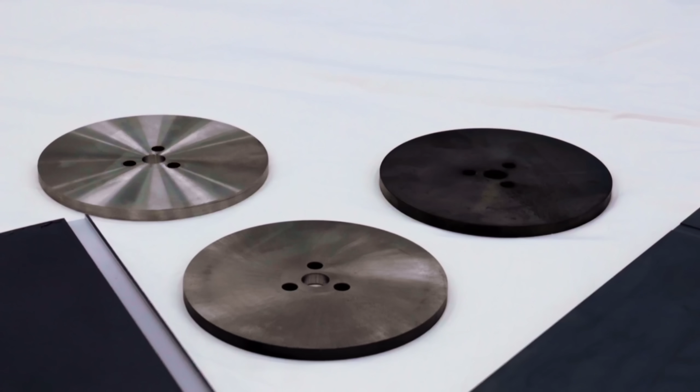Metals have long been the dominant manufacturing material, but ceramics are growing fast. If you're a machinist, you might be thinking ceramics are tough to grind. But are they? In this episode of the Grinding Chronicles, we're going to find out.

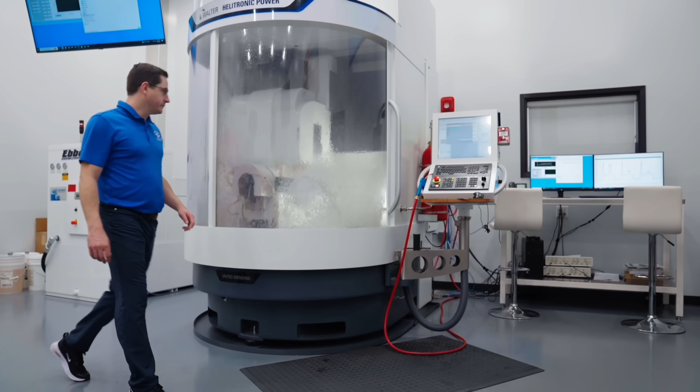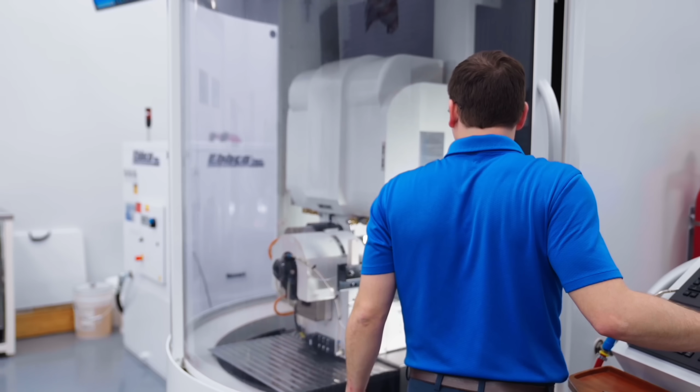For this video, we're debunking the idea that grinding ceramics is especially difficult. While some ceramics can be tough to grind, that's not always true. To explore this, we ran a trial to measure just how challenging different ceramic materials can be. We looked at the power and the force it takes to grind them effectively, then compared these results to various metals. With this experiment, we hope to provide useful insights for grinding ceramic materials.

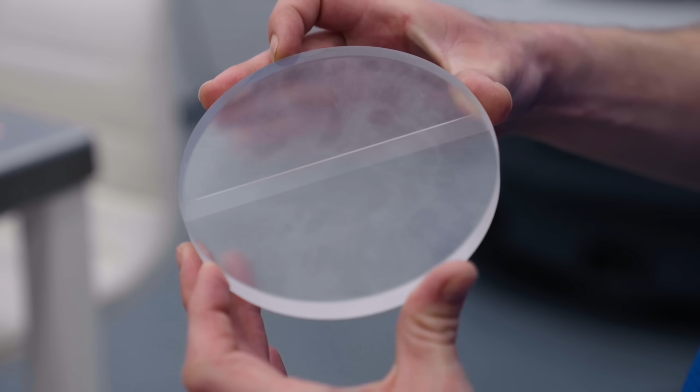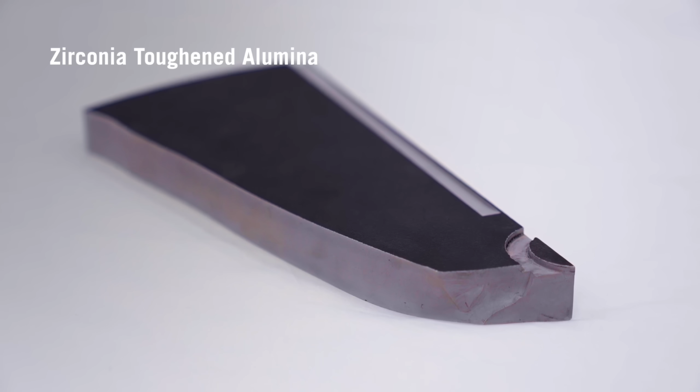But first, why do ceramics get such a bad rap? Well, technical ceramics fall into three main categories: oxides, like alumina and quartz; non-oxides, like silicon carbide and boron carbide; and composites. Composites combine metals, oxides, and non-oxides with particulate or fiber reinforcement. For example, zirconia-toughened alumina is a composite. Held together by strong ionic or covalent bonds, ceramics are typically strong and hard, but often brittle. I know, that doesn't sound good for grinding, but let's look at the trial.

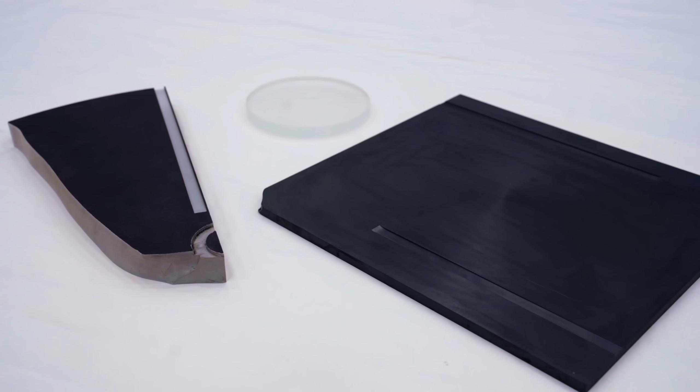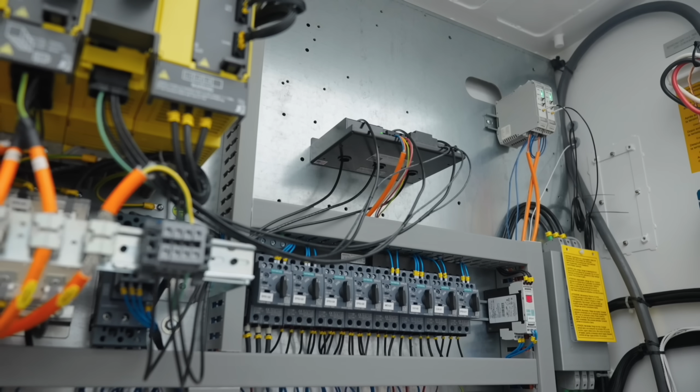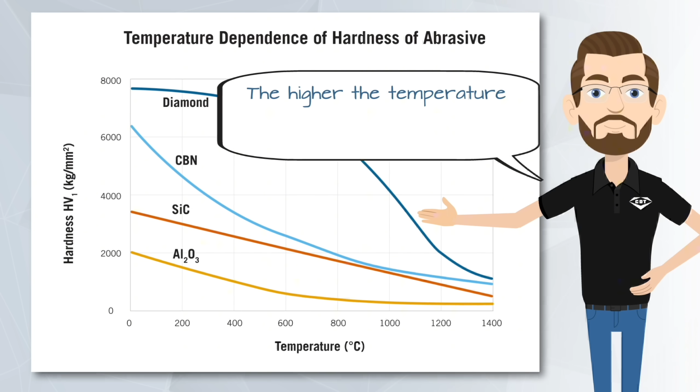Of the thousands of ceramic types, we chose 4 random materials: boron carbide, quartz, silicon carbide, and zirconia-toughened alumina. Each was cut using the same 240 grit vitrified diamond wheel in a surface grind. Sensors measured the power draw and cutting forces. Why are these important? Well, power is used to calculate energy, which determines the grind zone temperature. The higher the temperature, the faster the diamond degrades, wearing down your wheel.

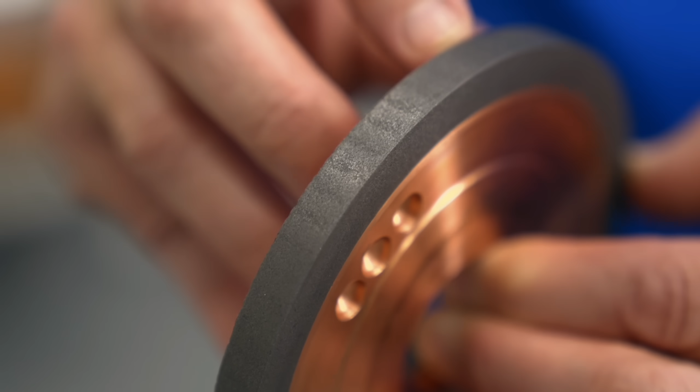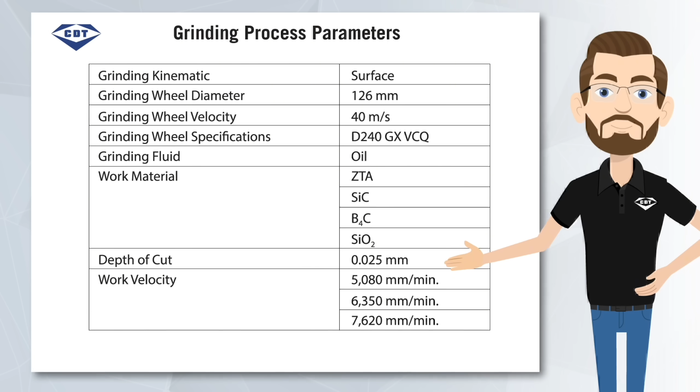Measuring force is critical too. If the force gets too high and the machine isn't stiff enough, it can deflect or vibrate, which increases wheel wear, machine stress, and quality issues like cracking. As you can see in this table, showing our trial parameters, we varied the feed rate 3 times, which gave us 3 different material removal rates. Let's look at the results.

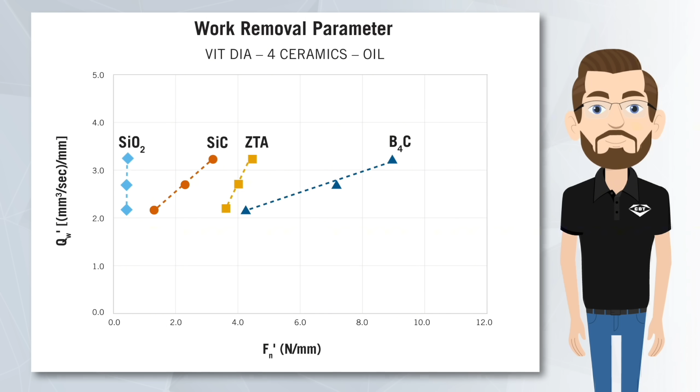First, we measured specific power and plotted it against material removal. If you're unfamiliar with specific power, check out episode 9 of the Grinding Chronicles. Here, we see boron carbide required the most power, while quartz required the least. Next, we plotted material removal versus force. You'll notice in this work removal graph that ceramic materials rank the same as they did in specific power.

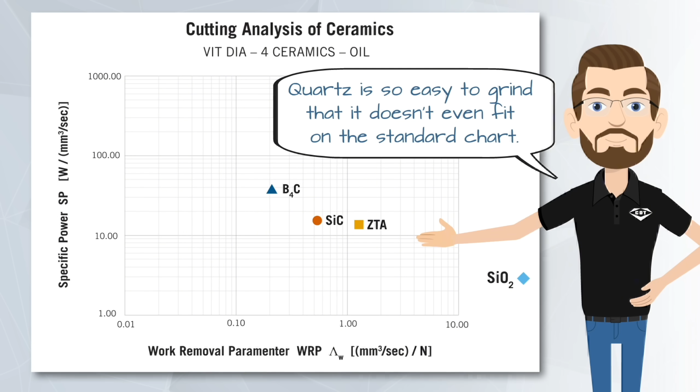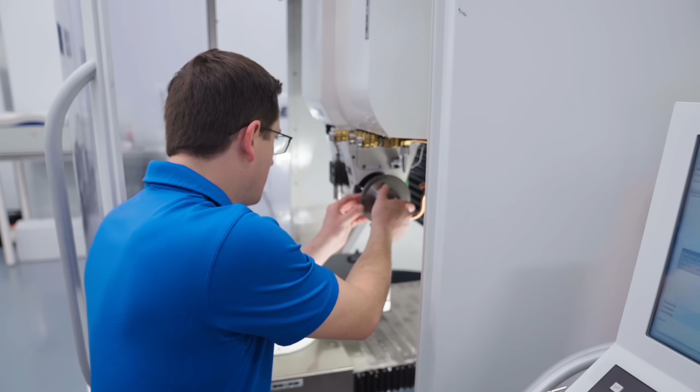Finally, we compared data from both graphs to demonstrate cutting performance, which basically tells us how easy or difficult these materials are to grind. We can see here that quartz is so easy to grind that it doesn't even fit on the standard chart. So what's the takeaway? For starters, not all ceramics grind the same. Like metals, some are easy and others are not. The difference is that more people are familiar with the properties, processes, and difficulties in grinding metals than ceramics. So ceramics aren't as daunting as they seem.

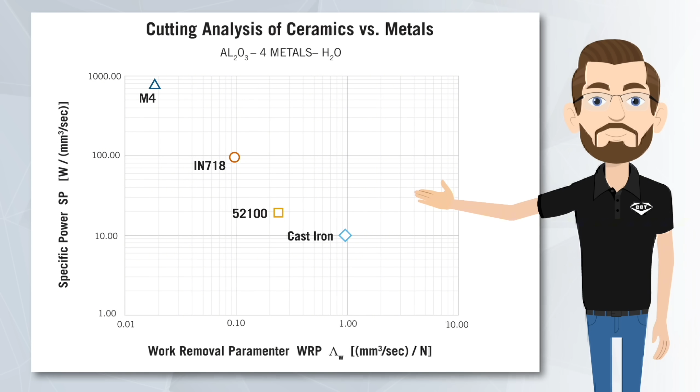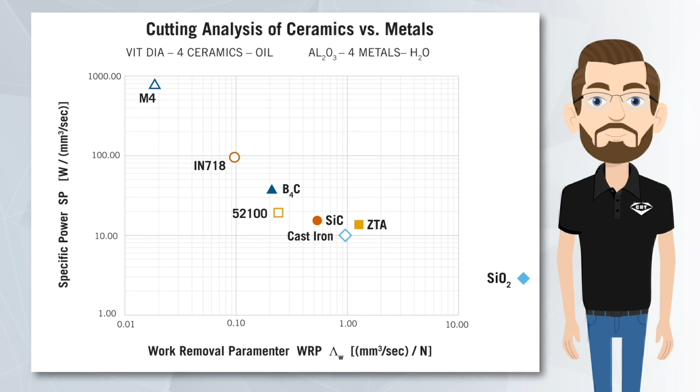In this 1970 study by Dr. Richard Lindsay, you can see the relative difficulty of grinding various metals with conventional abrasives. Notice that our data for grinding boron carbide with vitrified diamond is only slightly more difficult than grinding 52100 bearing steel with a conventional abrasive, while ZTA with vitrified diamond grinds as easily as cast iron with a conventional abrasive.

There are plenty of differences between grinding metal and ceramics, but from a power and force standpoint, ceramics have cutting performance levels similar to metals. The key to grinding ceramics, then, is understanding the best process, machine setup, and wheel to use for that particular material.